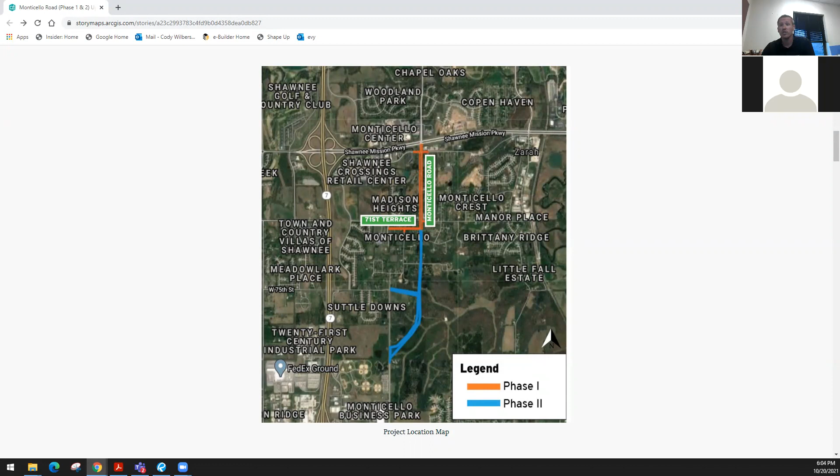Monticello Phase 1 is ongoing, I'm sure several of you have seen it. Today we've actually been installing surface course on the west side of Monticello Road, from Shawnee Mission Parkway all the way to the end of the project. That work will continue in the coming days, hopefully getting all of Monticello Road paved out by the end of the week. Pavement markings are scheduled for early next week, with the roadway hopefully opening by close of business on Wednesday. There will be minor work throughout after the opening, such as sodding, seeding, fence work, and a bit of work on a couple of walls throughout the project. So there will be construction traffic in the area, but the roadway will be open to through traffic, both north and southbound, as well as on 71st Terrace over to the school.

Phase 2 improvements will be commencing in the near future, hopefully the beginning of 2022. The project includes a new alignment of Monticello Road, starting at the end of Phase 1, just south of 71st Terrace, to the 7900 block, tying in just north of the 3 and 2 baseball park on the south side. There'll be a roundabout at 75th Street. We'll be installing 2 lanes in each direction from that roundabout to the south, and 1 lane in each direction with a center left turn lane from the roundabout to the tie-in point just south of 71st Terrace.

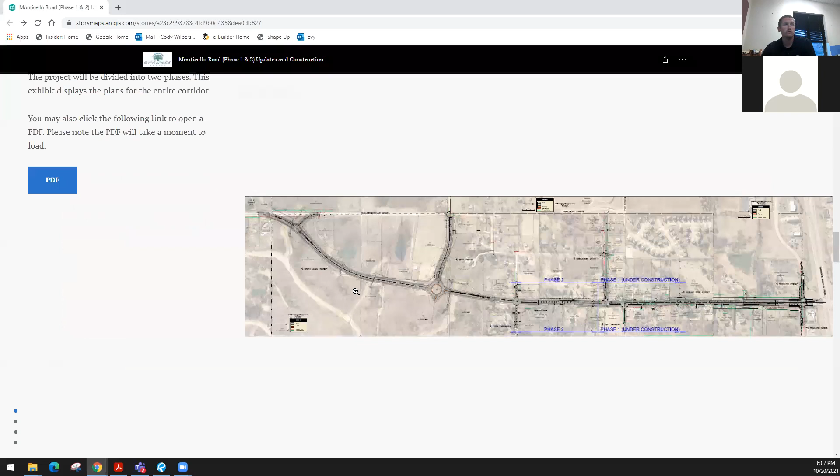I think one thing that stands out when people hear construction starting in winter of 2022 and ending in fall of 2022 is that I use Old Monticello Road, or current Monticello Road, quite a bit. Are you telling me that's going to be closed for 9 months, 10 months, etc.? And the answer to that is no.

Our plan here is to only allow access from the north side to the south side of Old Monticello to be limited to 2 months. So they'll construct this area to the east, and during the summer, after school has ended at Horizon Elementary, they'll come in and tie all this in. So hopefully 2 months later, you can come down here, turn left, and continue that way. Work could still be ongoing to the east.

Additionally, from Old Monticello Road, you'll have a dedicated turn lane to go southbound or northbound, and Monticello Road will have dedicated turn lanes to turn onto what will become Old Monticello Road.

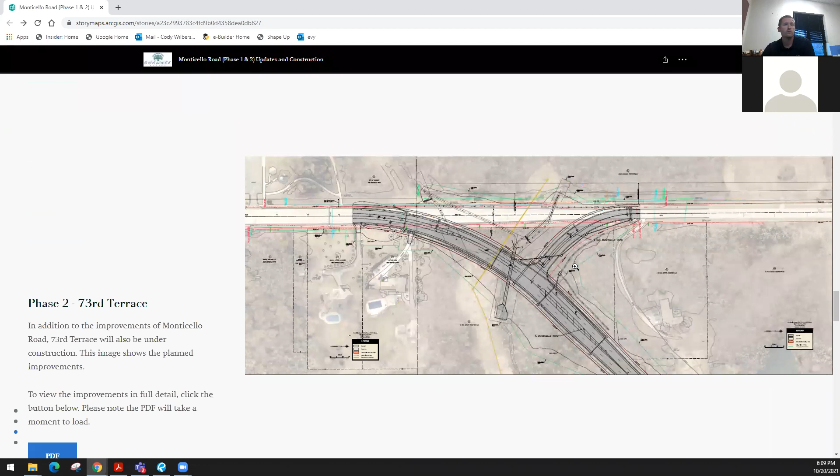This is a blow-up shot of 73rd Terrace. As you can see, this is the area north of that 75th Street roundabout, which we'll get to next. There are dedicated turn lanes from Monticello onto 73rd Terrace. Also, you can see some of the relocated drives and new drives throughout the area.

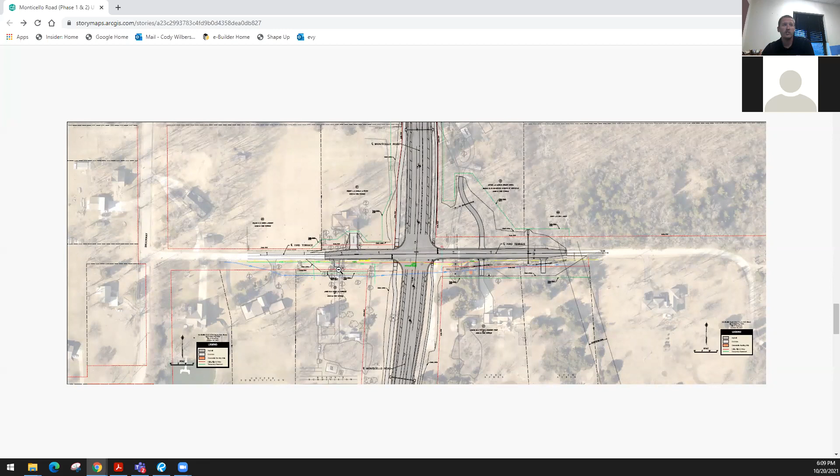We also have 75th Street, let me blow that up. Here's the roundabout on Monticello Road, and we'll have 2 lanes in each direction with dedicated turn lanes to go northbound or southbound on Old Monticello Road, as well as 5-foot sidewalks on each side.

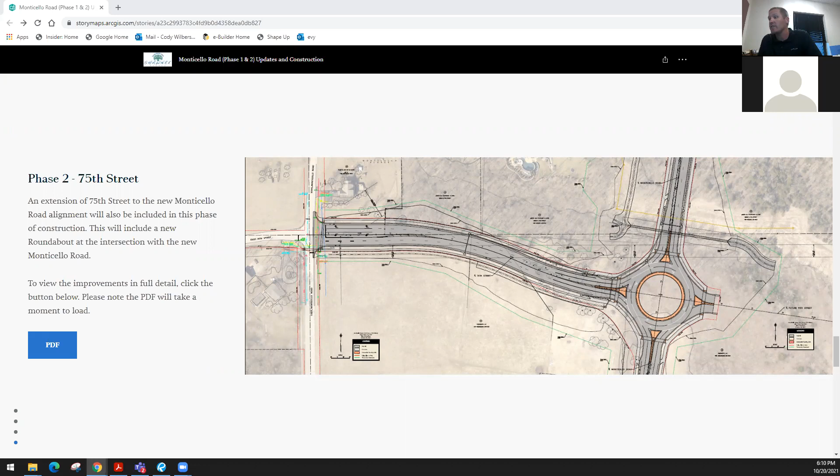Currently, we have one question in the chat pod, and it says: what will happen to the current segment of existing Monticello between the new southbound entry and the new southbound exit?

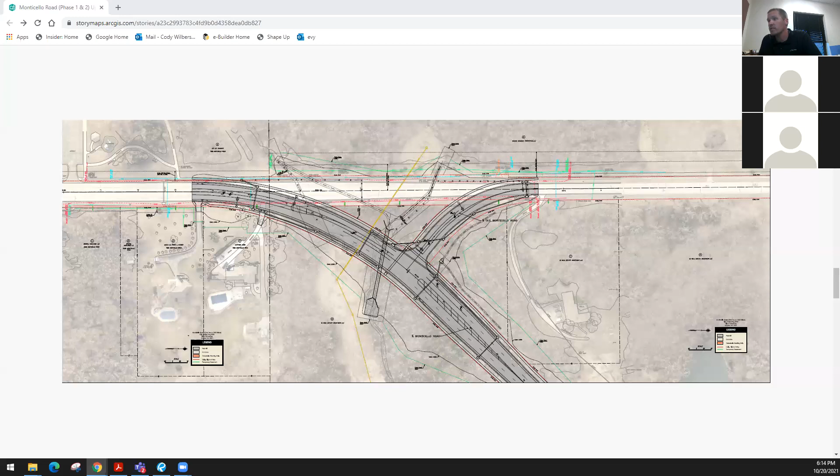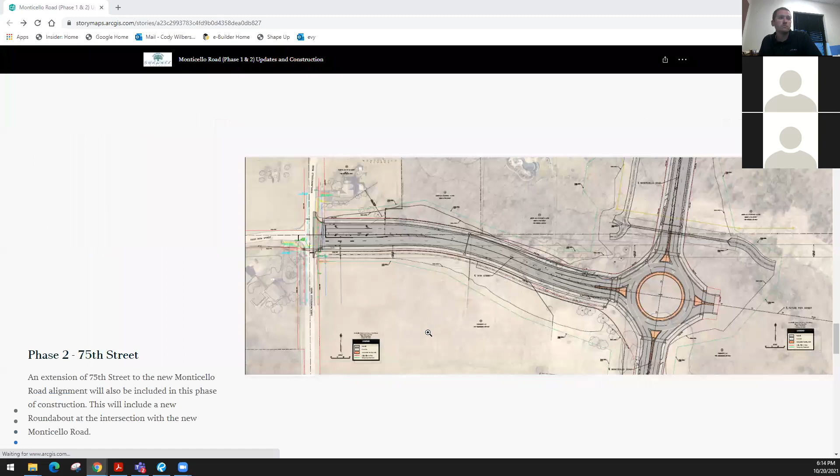To my knowledge, the roundabout has been discussed. It was included in the original 2008 plans. If that's incorrect, Aaron, let me know.

The thought of the roundabout here is just to decrease travel time, as both northbound and southbound, as well as 75th Street traffic, should be relatively the same, if not 75th Street traffic being a little bit heavier than Monticello Road. It's really, instead of a 4-way stop at this intersection, to increase movements throughout.

As far as safety goes, in my opinion, roundabouts have been proven to be safer because they eliminate angled crashes or head-to-head collision crashes, as those are more severe and more dangerous and lead to more paralyzing injuries or death. Roundabouts lead to more side swipes. Not a good crash at all, but those are less severe in nature and lead to less deaths as well as paralyzing type injuries.

Chris, would you like me to unmute you so you can further discuss?

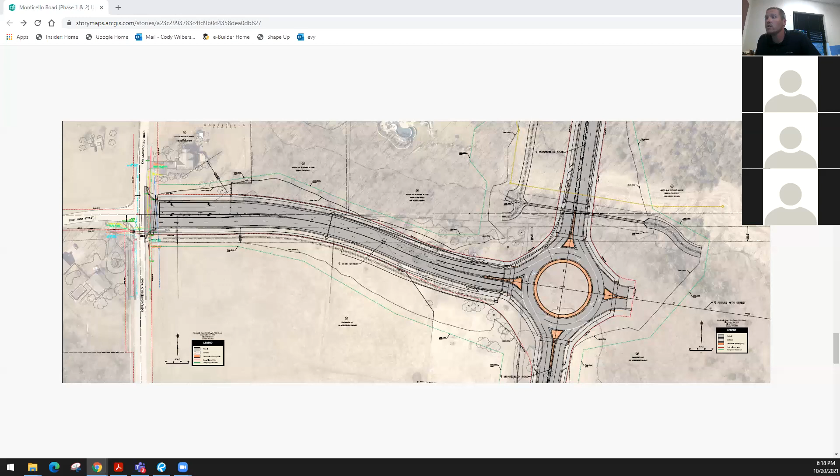Hi, yeah, thanks. I just was trying to visualize how those are connecting, because that's basically the whole point of this, right, is to bypass that curve. So is there actually room, are you coming in behind some of those houses? You're not actually taking out houses, are you?

There are no houses being removed at this time with this project. In 2008, one house was condemned for the design of the project. That occurred back in 2008, 2009. At this time, no additional housing is needed. Temporary construction easements were either still current from back in 2008, 2009, or we are going through the process now of acquiring the ones that have expired. Those are temporary construction easements, which I like to explain as basically land rentals. And if trees or landscaping or things like that are affected, the residents are compensated for. So yes, we will be going through people's side yards and backyards in the area to construct the new Monticello Road.

Okay, yeah, it's hard to visualize, but I can see the requirement for that, to straighten it out, to improve traffic flow. But anyway, thank you. I had a question about that. Yep, thank you.

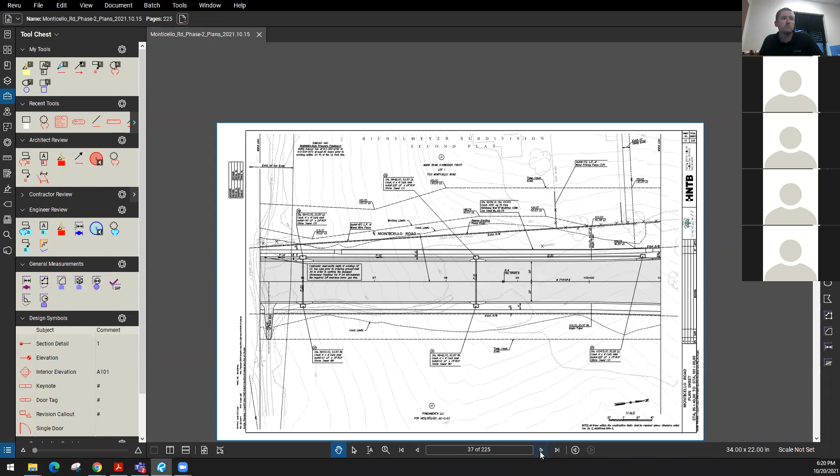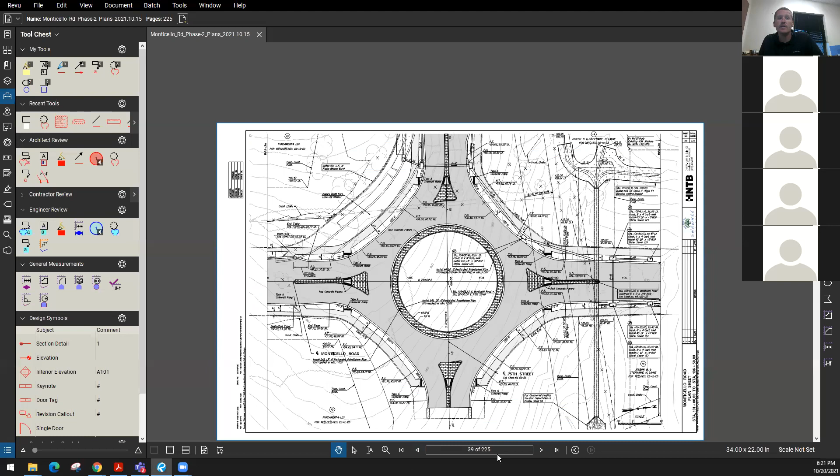This is the roundabout here. As far as elevation goes, just to the north of the roundabout, there is a fairly deep cut throughout that area. We will be filling in the proposed grade quite a bit there. The current elevation is at 900, just a little bit below 930 feet, and we're going to be raising that up to 960 feet.

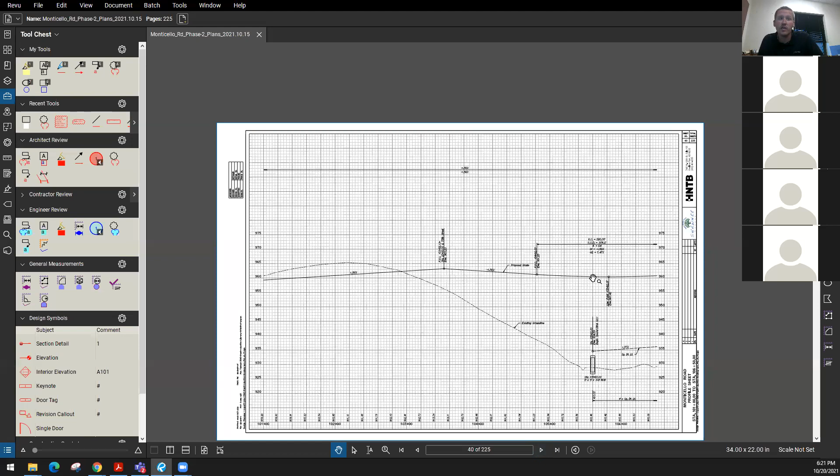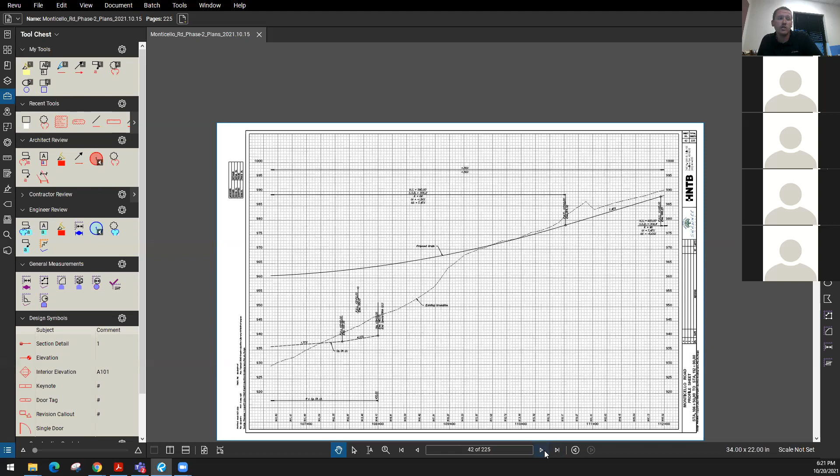As we move to the north towards 73rd Terrace, that cut obviously goes away, or that valley that currently exists. And then you see existing grade in this dash line, and we follow the existing grade pretty closely as we continue north. And here's 73rd Terrace here. Again, we do follow current grade, and when I say current grade, I mean the grade before the stockpile was placed there.

So imagine that stockpile being removed. Because Karen, correct me if I'm wrong, I think you live just to the west or southwest of where Monticello will go, and 73rd Terrace. So that'll be cut closer to what was existing grade before phase 1 kicked off, so that stockpile of material will disappear.

I'm going to unmute you to see if that answered your question or if you have anything else to add. I'm actually not seeing you have audio, so if you have anything to add to that, can you shoot me another message?

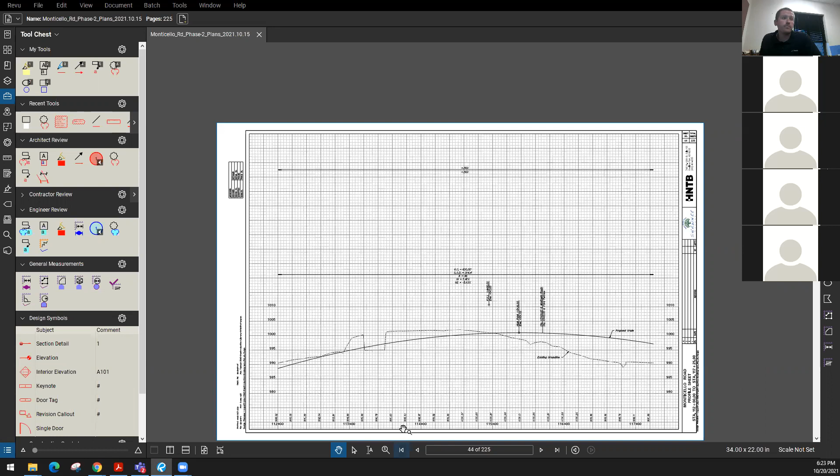So here's 73rd Terrace here. Monticello Road is right through here.

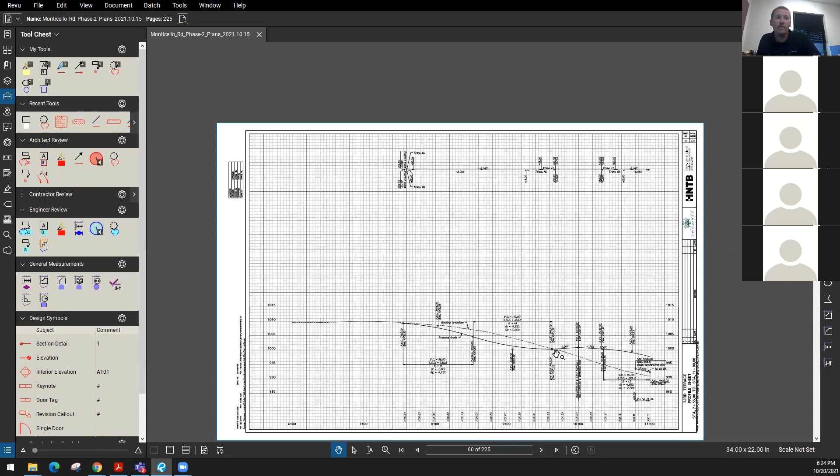So if you're talking to the west of 73rd Terrace, there is a slight cut to start off, to gradually work your way into what 73rd Terrace will be. The deepest cut in any of that area looks to be 4 feet near your driveway, which is right in here. It's about a 1 foot cut, not even that.

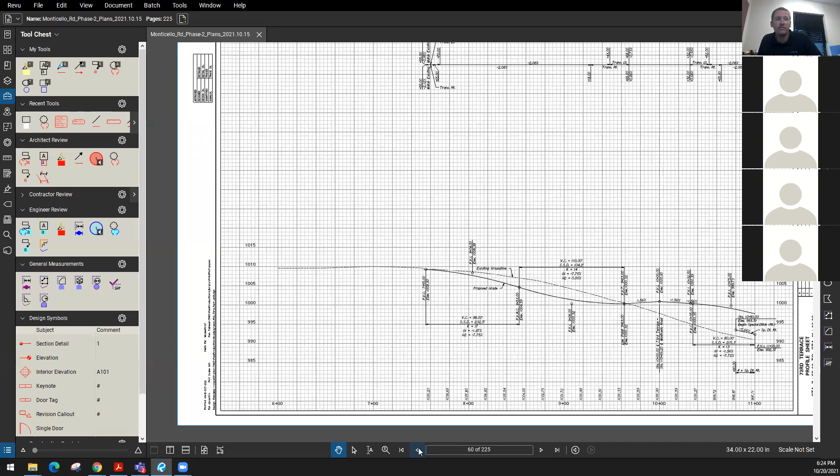So that is how that area is laid out. This cut here is just for a smooth transition to turn in and out of 73rd Terrace onto Monticello and vice versa. So over here, there will be more of a cut, and that'll work its way out as we work towards the west.

Any other questions related to that? Okay, thanks Karen. I have a question from Lisa. Hi Lisa. Will phase 1 residents be subjected to construction traffic for phase 2?

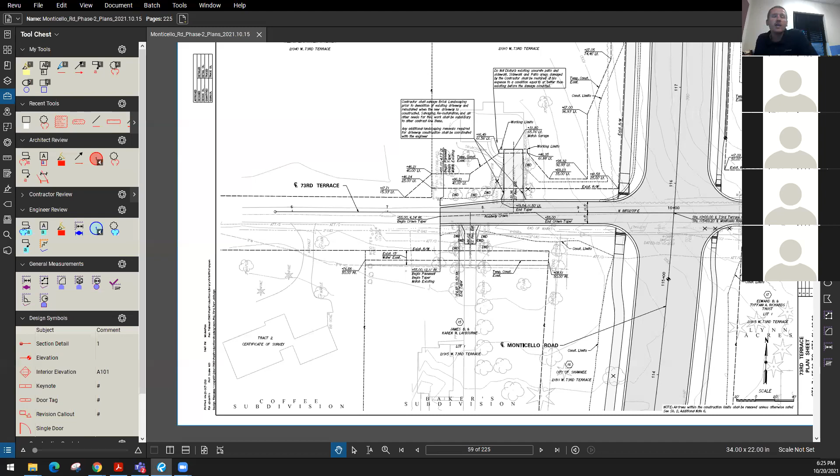I do think there will be some construction traffic in the area. This will be a construction entrance. I'm assuming everyone can see my screen again. There will be a construction entrance where Monticello Road currently ends to the south. I do think that'll be used.

Also, this project is a fill project in general. So we do have the mound here at 73rd Terrace, but additional material will need to be hauled in. Can't guarantee where that comes from, because we can't control where the contractor gets that material.

My gut reaction is they'll either come from K7 off of 75th Street to get in this way. If it's coming from the south, they'll probably come up Monticello Road and get the material onto the project this way. Or if it's coming from the north, they might come in through Shawnee Mission Parkway and down Old Monticello or New Monticello from phase 1. It seems unlikely, I just can't guarantee that.

In my mind, there will be little construction traffic for the phase 1 individuals, but there will be some.

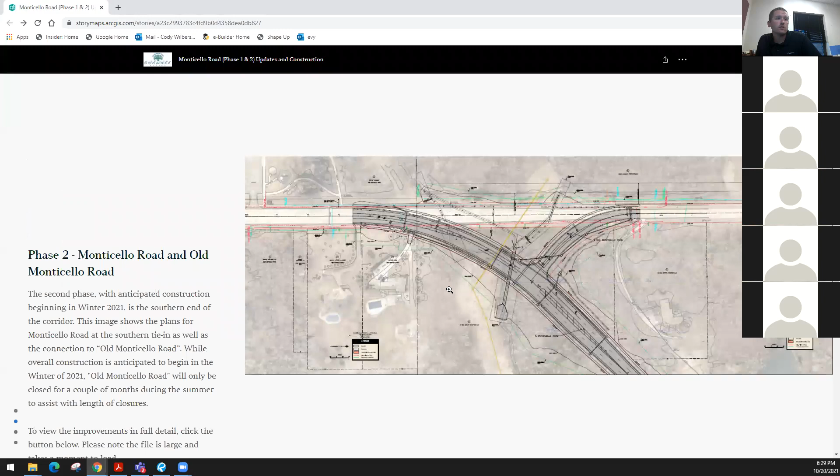73rd construction will not end at Brockway. It'll end really just past the first couple houses. It goes about 200 feet west of where the new Monticello Road will be placed.

I do know there are some potholes through this area from a haul route for the storage that's located on the south side of 73rd Terrace. Those potholes will be repaired and fixed with the phase 1 project.

That work is scheduled really probably in a 2 week time frame. We'll be marking those up. They'll be in there removing those really significant holes and repairing those. And those are on both Brockway and 73rd Terrace. But the improvements, the curb and gutter, will not go all the way to Brockway.

JG, I'm going to ask to unmute you. If you got anything else with that question, please let me know. I'm assuming there's no other questions with that then.

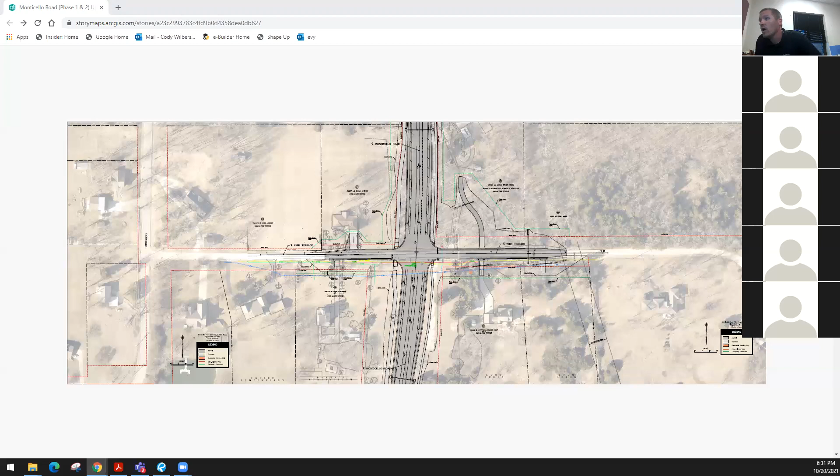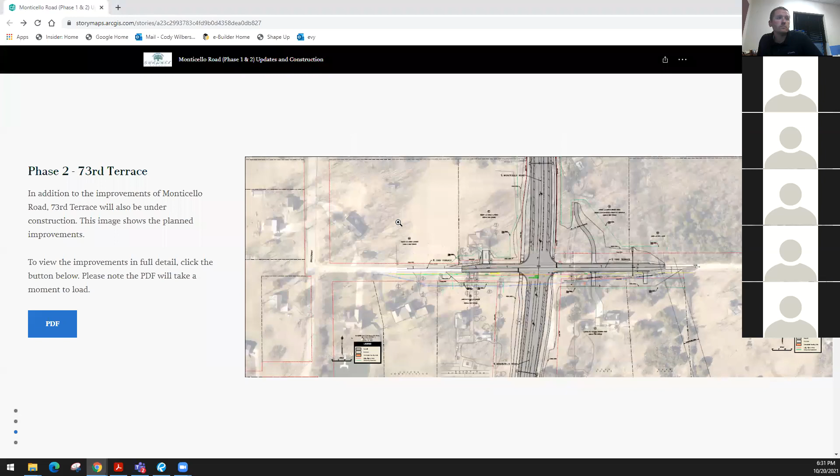Chris asked another question. Old Monticello, south of 75th, will remain as a 3-lane bypass to get to 83rd. Old Monticello will remain as is, so this will stay as it is currently constructed and built today.

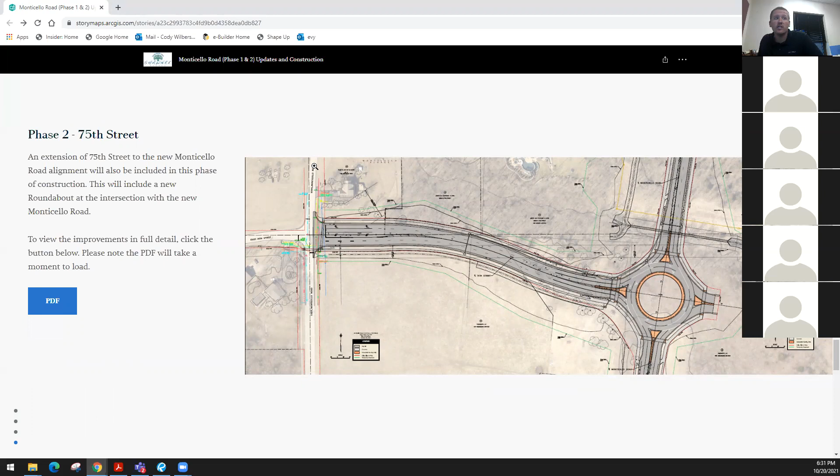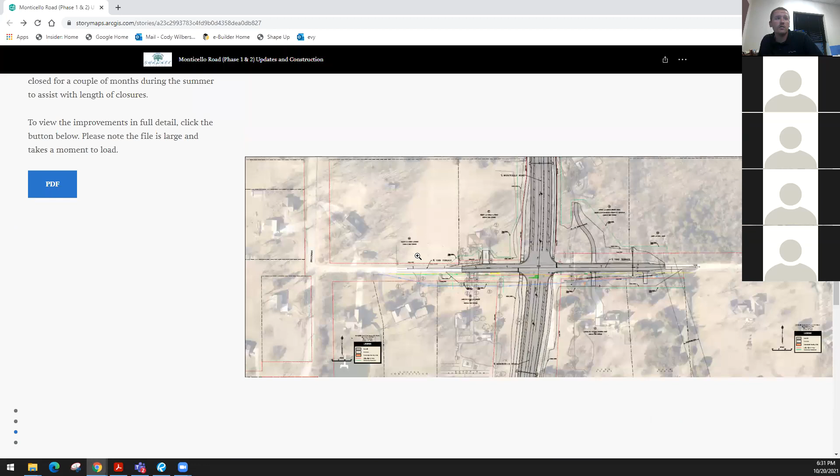As you work your way towards the tie-in at New Monticello, Old Monticello will turn into New Monticello, and there'll be a turn lane to the south, a turn lane to the north, as well as 1 lane going up.

I'm going to unmute you, Chris, to see if there's anything you'd like to add. I saw this question the first time you shared it, and I apologize, I guess I didn't understand the big picture. So in between where New Monticello merges in, is that stretch of road going away? So there's only going to be that curved intersection in the future? Correct. This section of roadway, the triangular piece to the west...

This will be removed. A good portion of it will become a drainage ditch to make sure our flows work correctly and everything continues moving downstream. This piece, currently just a lot at this location, will become a drainage ditch. This will all be removed and we'll be cutting ditches in here to assist with that flow. Yeah, this whole roadway will be removed at this section, so you'll turn into what is New Monticello.

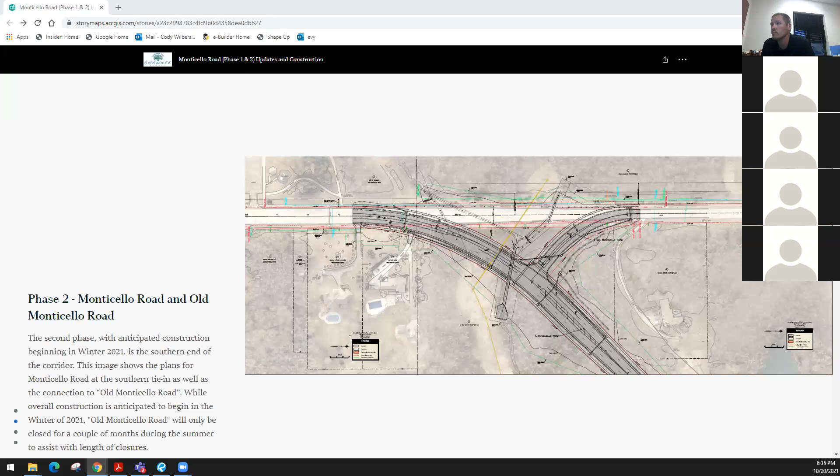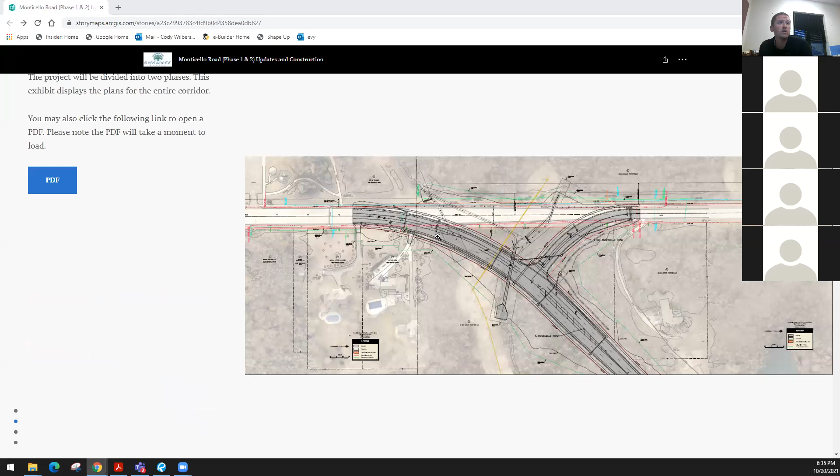Anne asked, is there any plan to upgrade the intersection at 87th Street? Are you talking about 83rd Street to the south? Yeah, sorry, I meant 83rd. No, that's fine, I just wanted to double check. At this time, that's not under conversation at this point.

Things always change quickly, and traffic patterns may change quickly with this project, so I think we'd assess that at that time. Yeah, because it's already kind of difficult to make left-hand turns out of there, and I feel like if there's going to be a lot more traffic, that's going to be an issue.

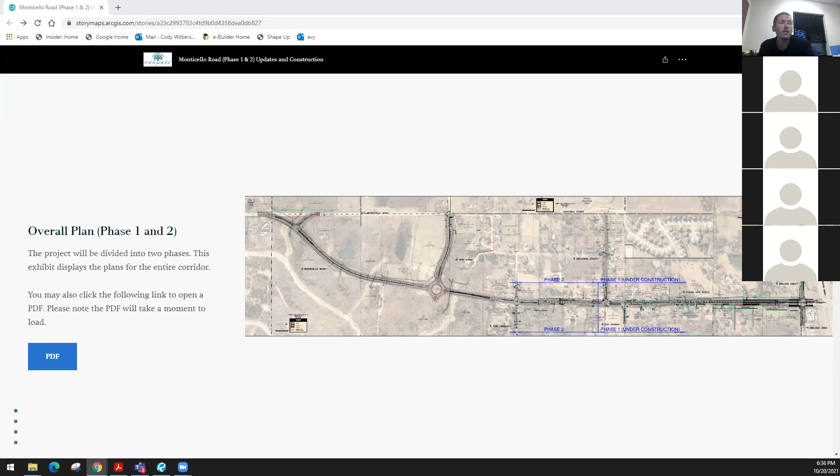And Lauren, I'm going to reach out, I'm going to tag a friend in. Lauren, is there a signal project scheduled for 83rd Street coming up? Or Ernie, do you know of that as well? There might be a signal project scheduled. I'm not 100% sure about that, so I can get back to you on that, 83rd Street and Monticello. Yeah, I was just wondering.

So yeah, Lauren did say there's a project in the works with Lenexa that we're working on. Okay, because I'm just anticipating if there's a lot more traffic there, that's going to make it impossible to make left-hand turns out there. So if that signal project is in the works, we're working with Lenexa on that. Okay, thanks.

Dave asked, when will phase 2 construction begin? Our goal is to have this advertised in late November. From there, we're hoping to get approval from council at the first council meeting in January, with construction beginning shortly after that. We have to get the paperwork signed between the contractor, the city, and Johnson County, and have pre-construction meetings to discuss that. So our goal is that we're moving dirt middle to late January, that's when you can expect construction to begin on phase 2.